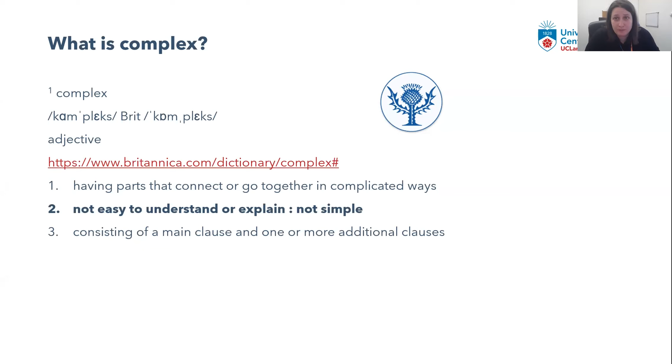As you can see in the title, we have the word 'complex.' I struggled to group together various components that make it difficult to understand or explain some concepts when it comes to buildings. I found that 'complex building' is a suitable term, because according to some dictionaries, one definition of complex is 'not easy to understand or explain, not simple.' So when it comes to buildings, what is complex? Here you see a facade of a building that certainly isn't something you'd call simple. Complexity can come from different components, such as design, height, facade, the use of the building itself, and the use of materials.

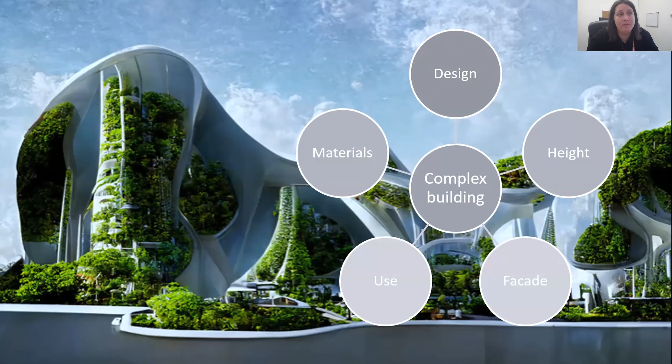Now, why are these types of buildings emerging, and why is this becoming a trend nowadays? You must be aware that there is a green agenda being promoted in most countries, and fire engineers should approach net zero challenges. So one of the issues we should address is actually balancing safety and sustainability.

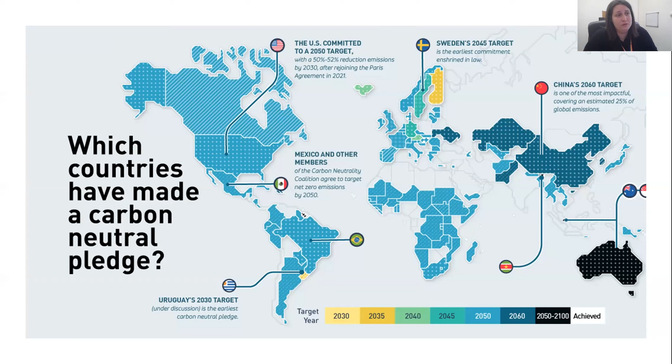This is a very nice graph showing which countries have made the carbon neutral pledge. More than 130 countries have committed to carbon neutrality, and this is a goal. The target year to reach net zero is 2030, 35, 40, 45, 50, and beyond. Only two countries have achieved net zero by now, and most countries around the world are committed to achieving net zero by 2050.

This is also reflected in most regulations in most countries. These are some documents issued by the European Union, the British government, and the Australian government, just as examples. Reduction of energy consumption is a strategic goal for most countries to ensure sustainability and reduce greenhouse emissions. This is the reason regulations are getting stricter and stricter regarding thermal properties and the design of construction and buildings.

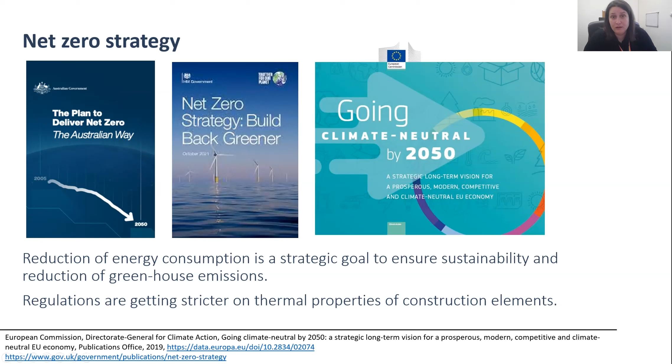This is reflected in how we design our buildings. What is the rationale of the design we use until now? We need to achieve aesthetics because we need to like the buildings we live in, but at the same time, it's now a priority to design energy efficient, sustainable buildings that include innovative components. But let's not forget that one of the main issues is to have safe buildings. Sometimes, though, balancing environmental goals and fire safety can be a rather complex procedure.

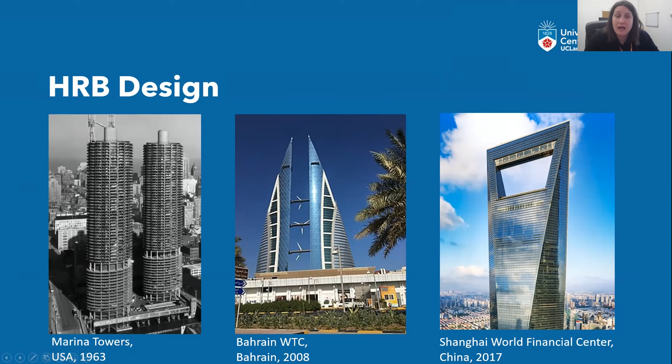But a second category of complex buildings is actually buildings that have curvilinear design. Curvilinearity is a concept that has been widely used for many years by many architects, inspired by some of the most famous ones, such as Gaudi or Zaha Hadid, and the style has been propelled into the forefront of architectural consciousness.

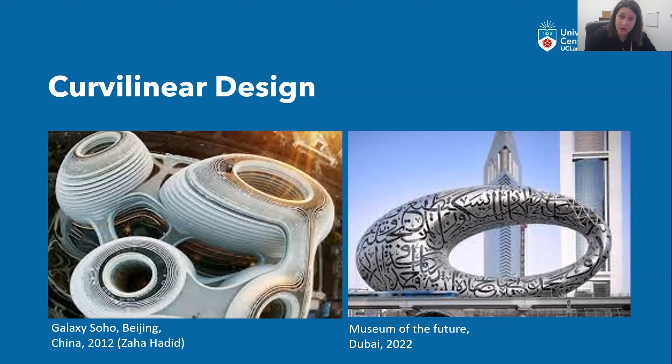On the right-hand side, we see one of the most complex curvilinear buildings, the Museum of the Future, built in Dubai in 2022. This building aims at a platinum LEED rating in terms of green rating, so it's not only a complex and fancy building, but also a green building.

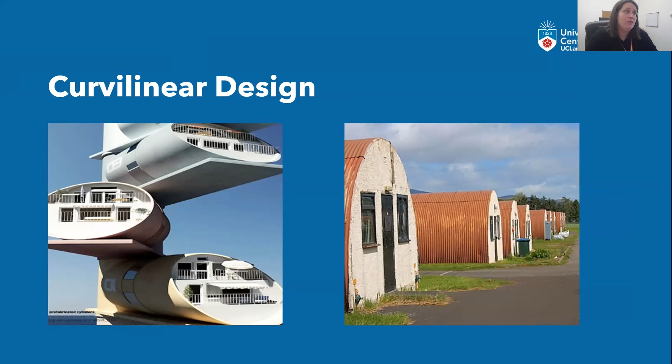Actually, this is the way that we define curvilinearity. So we use normal vectors. A normal is a vector vertical to a surface in order to define the orientation of the surface and what are the geometrical features of it.

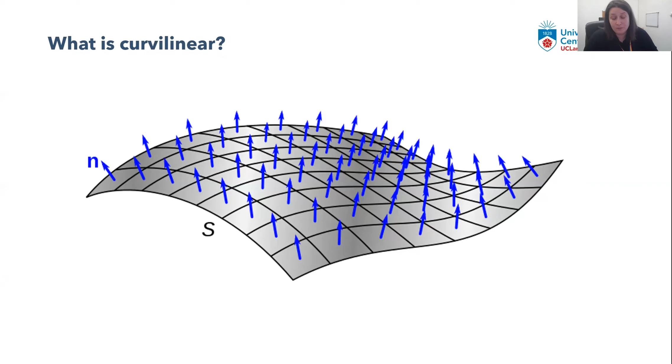But let's start with what is a facade. A facade is actually the skin of the building. It keeps it separated from the external environment.

Now, as we did mention, there is a trend of green building concepts and sustainable construction, so energy efficiency of the facade is one of the major drivers in construction industry. To promote those types of design, we have the development of new energy efficient lightweight materials with good thermal insulation properties, used to reduce heat gain and loss through the facade.

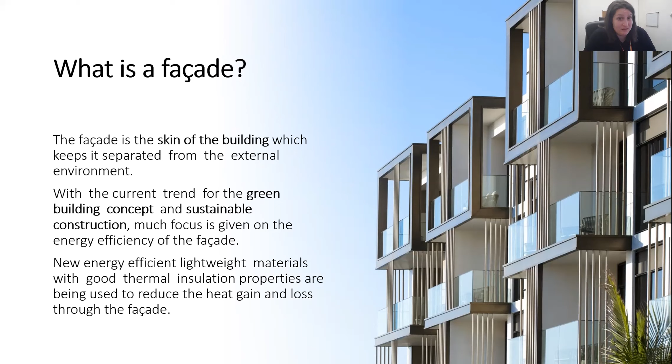Also, as you know very well in Queensland University, other sustainable materials such as wood can be used as part of facades. Now, the problem is that we still have a big number of facade fires happening around the world. So what is the reason?

The reason is that though we have put a lot of attention into building those types of green, efficient, and smart facades, there is less attention to the behavior of such facades in case of a fire. New facade designs have often resulted in significant changes to the behavior and role of facades in the fire spread of buildings.

But we also have new techniques and new materials being developed, and they also contribute, and we still don't have a full understanding of how they contribute to facade flame spread.

Some might argue that non-combustible materials is a guaranteed solution. I would highly disagree on that, because you might still have flame spread and still have problems. So the issue is not to ban specific materials, but rather to learn how each material can contribute to fire and engineer appropriately.

So here, for example, you see some facade fires that happened recently. You should have heard of the Grenfell Tower event, which triggered a lot of debate in this research area and really pushed the direction of research on how we should understand facade fires in high-rise buildings.

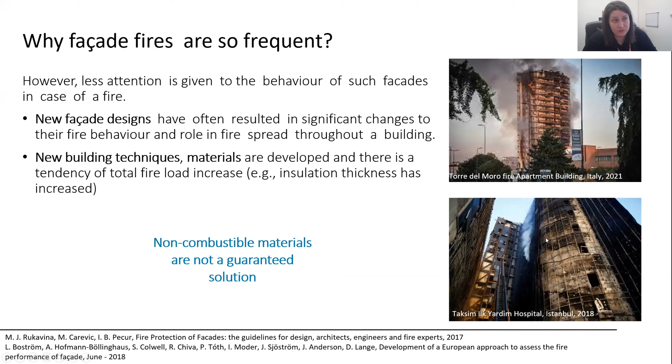So here is the Torre del Moro fire apartment building in Italy, 2021, and Taksim Ilk Yardim Hospital in Istanbul, 2018. I present those because they're not only facade fires, but facade fires in high-rise buildings with curvilinear geometries. So we have established that facade can be a critical element in building fire spread.

And actually, this is not a new field. A lot of work has been done in the past, and it has been acknowledged that flame spread on building elements, especially on walls, is an important application area for basic flame spread theory and material properties obtained from tests. For example, the work of Quintiere, as displayed in many of his works such as Principles of Fire Behavior, is a pioneer in the field.

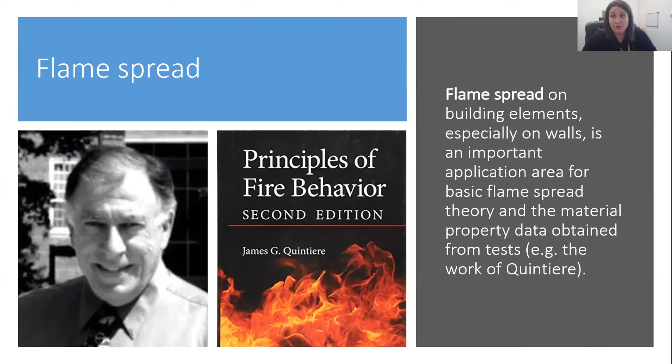And also, there are many different researchers that have focused on those types of fires. Currently, there are some practical approaches and some analytical methods to predict correlations between the theories of ignition, flame spread, combustion, and material properties.

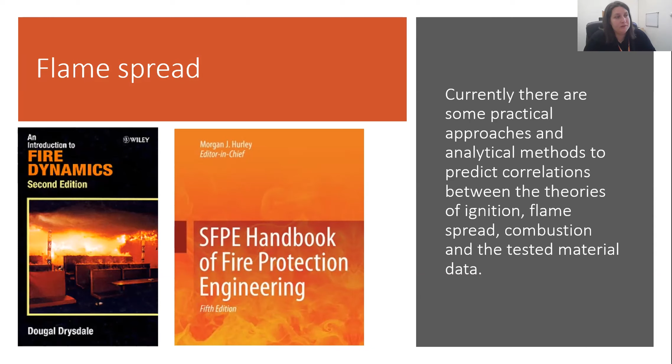But still, we have an occurrence of many incidents around the world. So our student Anoop really tried to record those facade fire incidents. Building on the database that was initially produced by Matthew in Hazelab in Imperial, he extended the data and included recent fires, and he recorded the different types of buildings involved.

So as you can see here, 57% of those buildings are rectilinear buildings, meaning they are orthogonal buildings, but 25% of them are curvilinear and 18% of those are non-orthogonal. This is a registry until 2022, if I'm not wrong, that includes all the information as depicted in media regarding high-rise building fires.

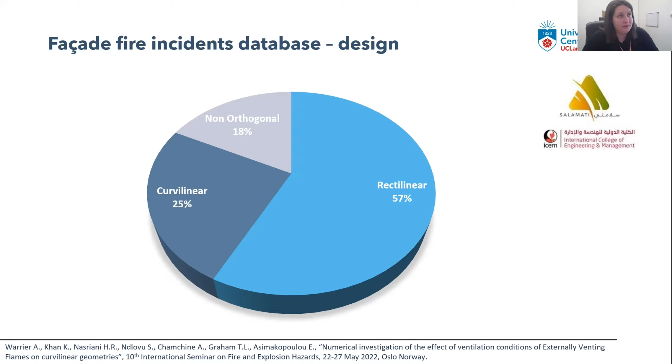So actually, as part of his PhD, we're trying to understand what is the effect of curvilinearity on how facades evolve in curvilinear geometries. And the thing is that this is a study that has started many, many years ago.

One of the first researchers to investigate external venting flames, denoted as EVF throughout this presentation, was Yokoi back in Japan, who investigated the physical characteristics along with Webster and Seigel in the 70s. After that, Margaret Law, in 1978, started investigating the formation and validation of a set of correlations to predict compartment fire dynamics and the effect of facade fires on the heating of external structural elements.

This work was further progressed by Oleszkiewicz, Ohmiya, and Klopovic. Klopovic did the first large-scale test experiments in Canada back in 1999, investigating the full-scale phenomena associated with realistic fire load burning and what would be the effect of ventilation, which is another research area for us.

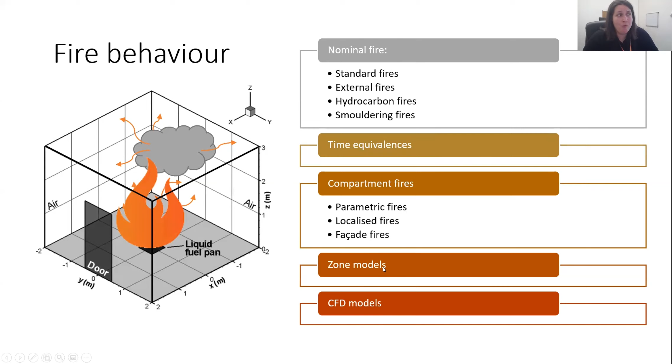Usually, in order to investigate fire behavior, there are plenty of different tools that can be used, such as nominal fires, time equivalence methods, and in compartment fires, specific methodologies for facade fires. On top of that, we can use more advanced models, such as zone or CFD modeling.

In these terms, there are two approaches in the design. Firstly, we have the prescriptive approach, where nominal fires are used to generate thermal loads. This approach indicates a set of rules for the design and verification of structural elements.

One of the main drawbacks and restrictions is that most of the prescriptive approaches currently available can be applied to rectangular geometries with restricted floor areas, no ceiling openings, and no specific thermal properties for multi-layer facades or more complex facade components. An alternative is the performance-based approach, where more advanced models such as CFD or zone modeling can be used. The issue here is that no particular guidance is given, and the identification of the means lies with the engineer. So these are the two different approaches.

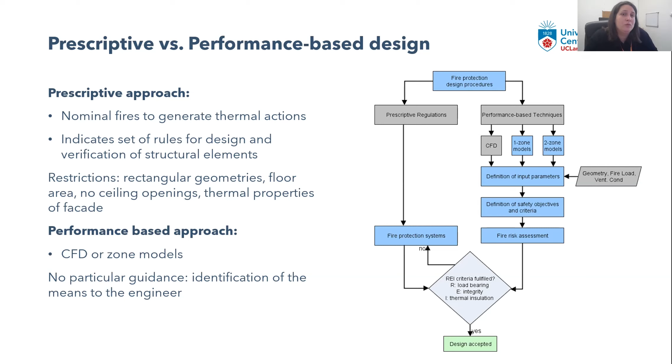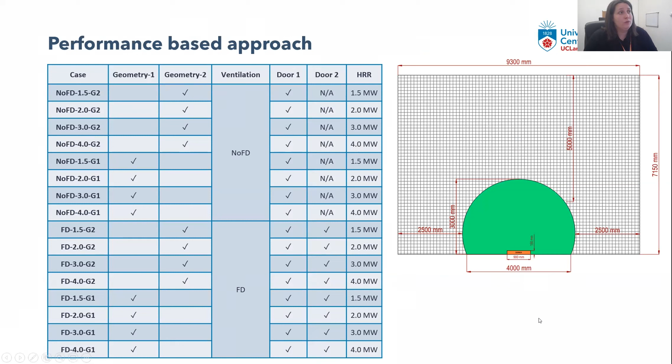So two geometries have been investigated: one with a curvilinear profile, depicted here as geometry 1, and one rectilinear with an equivalent volume. The dimensions as depicted here are the same, so we have the same width and the same length, but each time the height is different in order to make sure we have the same volume in our calculations.

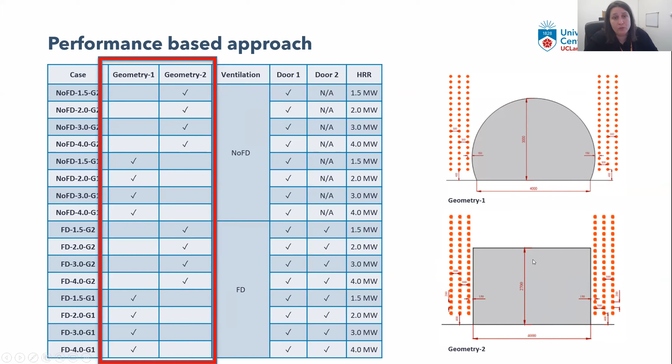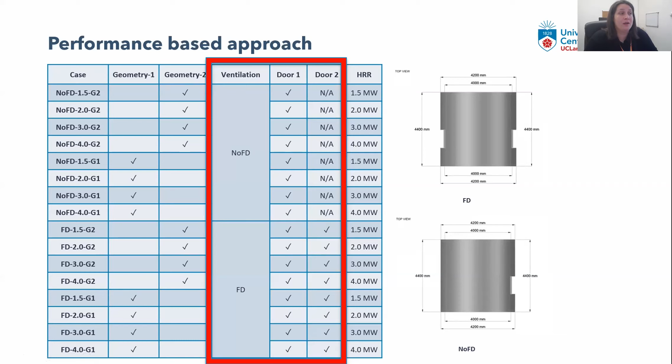Now the second parameter is the effect of ventilation. Two different ventilation conditions have been used: first, the forced draft conditions where two openings exist at the sides of the geometries, and then another ventilation condition where only one opening is located at the fire compartment. The third parameter investigated is the effect of the heat release rate of the fire.

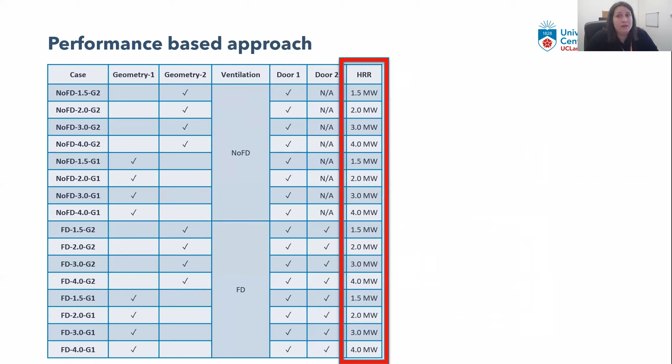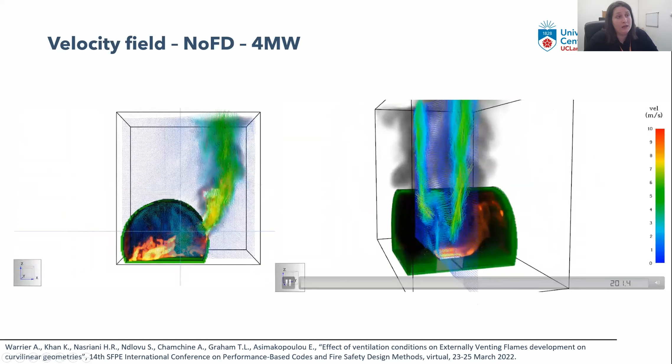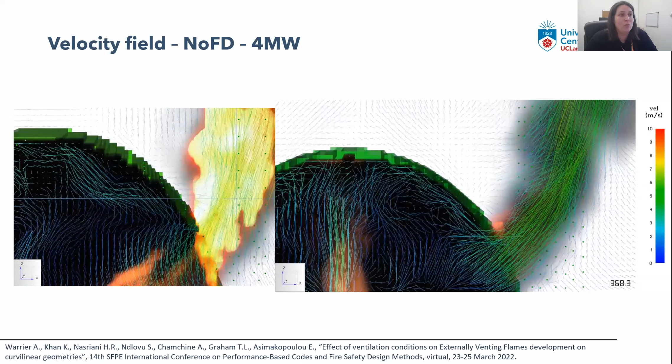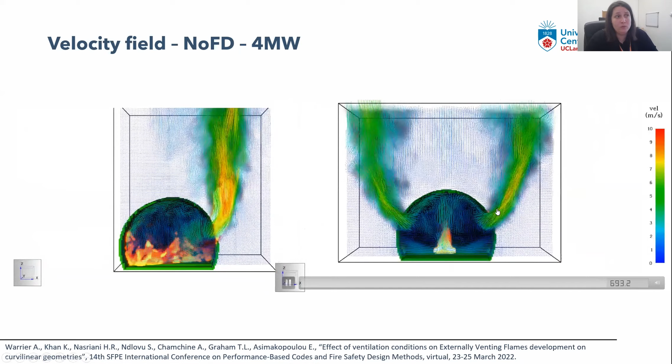We can see that here, zooming in, we see the formation of recirculation zones that are pushing and driving the externally venting flames towards the exterior. We see the recirculation zone formed inside the compartment for the no forced draft condition. But when we have two openings, we get the formation of two recirculation zones at the interior of the fire compartment.

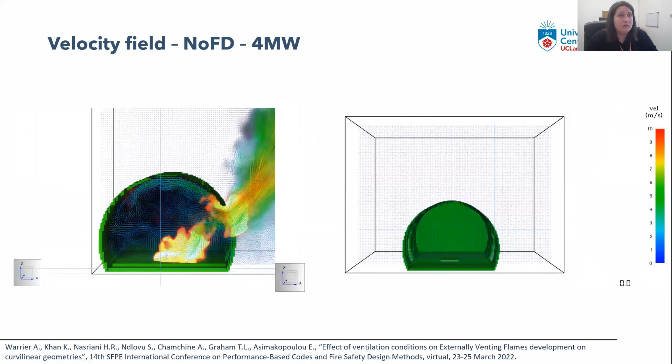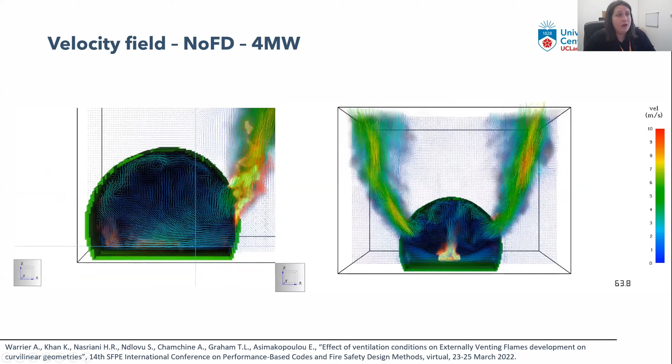The maximum velocity is 9.5 meters per second, and we can observe that the flames are tilting towards the exterior of the building. This is a completely different behavior, and it's also illustrated here.

In compartments with curvilinear geometries, as we can see from the right-hand side images, we have observed a smoke movement that can be a complex fire dynamic process because of the interaction of turbulence, combustion, and radiation with the geometry of the compartment.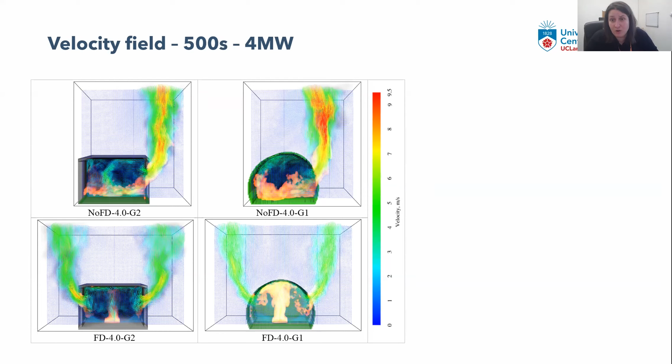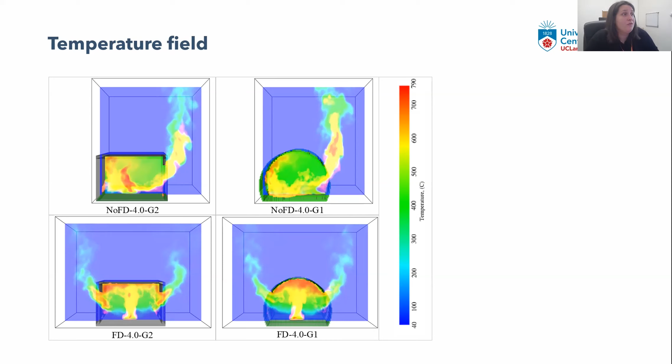Though the shape of the flame usually fluctuates, we can see that the externally vented flame plume sizes are increased in curvilinear geometries for all heat release rates. This is also depicted here.

This is a contour of the intermittency profiles of the flames at the center line of the compartments for both geometries. What we can see here is that the externally venting flame plumes generated under curvilinear fire compartments have higher heights and are more intense.

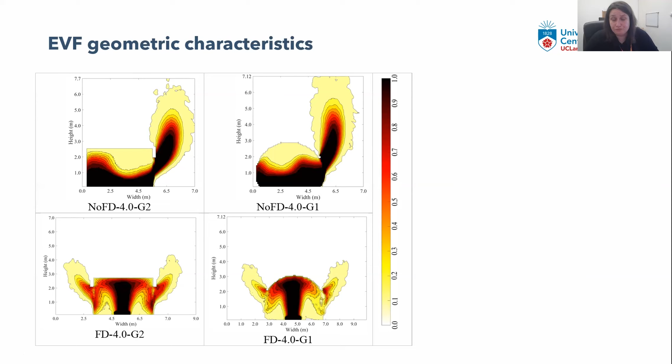Now, the plan is to progress this research and perform fire testing to validate the results and investigate what the effect of scale is.

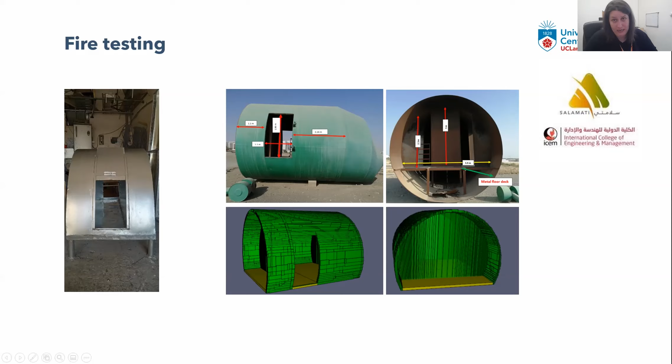This week, Anoop and his team are finalizing fire testing in this curvilinear medium scale structure. Then the plan is to progress testing using this facility that exists at the International College of Engineering and Management in Oman. Preliminary work has been performed to assess how these fires will evolve, but the plan is also to test different ventilation conditions at large scale to investigate the effect of scale.

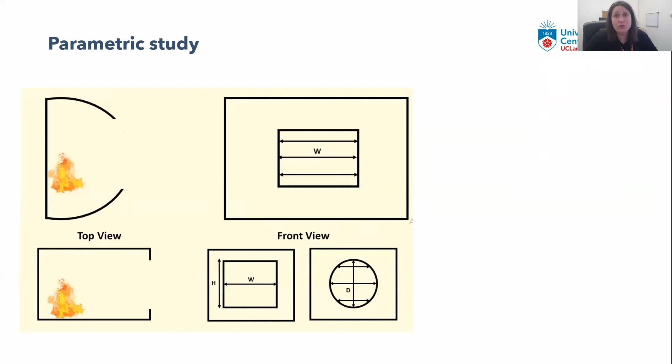Also, the geometry of the opening is of great importance, so different types of openings will be tested to understand the effect of curvilinearity in openings. Now, one of the other crucial parameters in fire development is the interaction of the draft, meaning the ventilation conditions.

As part of the work we have performed with the Technical University of Ostrava, with Jan Smolka and Kamila Kepna, and the International College of Engineering and Management in Oman, and VUBP, we have investigated the effect of no forced draft and forced draft conditions on the development of facade fires.

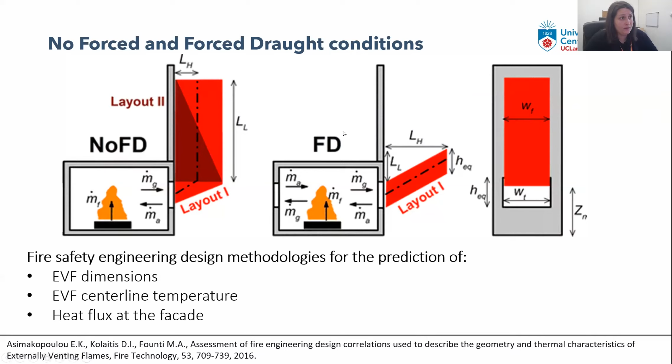There are fire safety engineering design methodologies for predicting the dimensions of facade fires, centerline temperature, heat flux, and generally the impact on the facade. But with the design of this experimental configuration at the University of Ostrava, we tried to investigate the effect of ventilation under forced draft conditions.

To investigate forced conditions, there is a fan placed at the rear side that forces air into this compartment at 2.9 meters per second. In that case, the investigation focused on the effect of the opening dimensions and the wind speed under forced conditions.

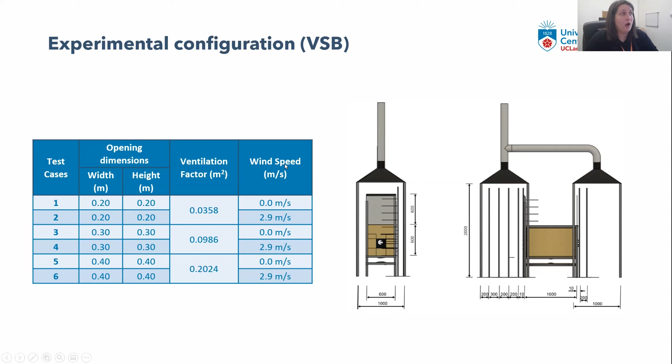On top of that, Anup, as part of his thesis, also numerically investigated the same configuration in order to validate its procedure and to help extend the findings of this research to investigate more and perform parametric analysis.

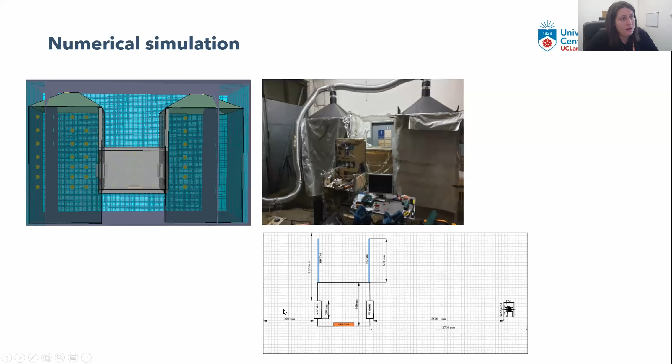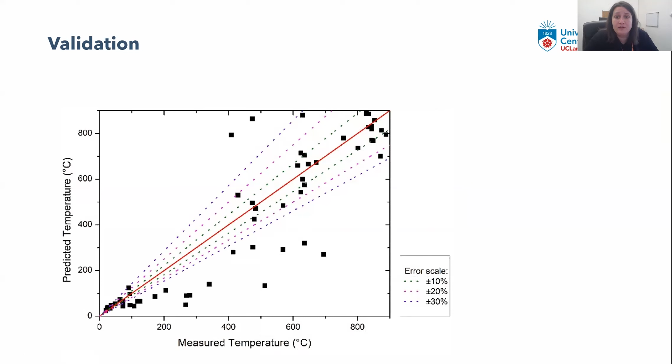As part of the work, a validation process was performed in order to investigate the validity of the predictions. The data plotted, as you can see here, showed that 70% of the predictions fall within the 30% error margin, indicating a good agreement.

Now, when it comes to the investigation of the effect of the ventilation, this is a screenshot 150 seconds after the beginning of the fire, illustrating the flow field developed and the relevant flames when we have a forced draft of 2.9 meters per second.

Here at this image at the top, we have the 20 by 20 centimeter opening, and here at the bottom we see the larger opening. At the left-hand side, we can see the no wind condition, so we have no fan there, and at the right-hand side, the forced conditions.

Now, for all the opening sizes, bidirectional flow was observed as fresh air was entering through the bottom part of the opening, and hot gases exit through the upper part of the opening.

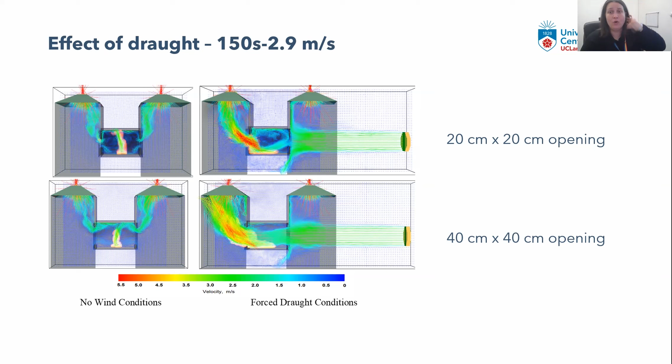Now, the externally venting flame is located closer to the adjacent facade, and under forced draft conditions, we see similar flows: inflow of air from the bottom part of the opening, formulating two recirculation zones. However, once the fan induces the presence of wind, the recirculation zones near the opening are no longer visible, and we have a single recirculation zone at the interior of the fire compartment.

Now, one of the first tasks was to actually validate and compare the temperature profiles. So these are two graphs indicating how experimental results compare with numerical results for the different openings.

With the different colors, black, blue, and green, we see the different opening dimensions, and then with the dotted lines, we see the experimental results, and with non-dotted lines, we have the numerical results.

There is good agreement, especially—and at the left-hand side, we see the no-wind condition, and at the right-hand side, we see the forced draft condition. We can see a very good agreement, but there is a slight disagreement at the larger opening heights.

Now the same results are plotted at the temperature profile at the facade. Here we have still a good agreement, but in case of the greater opening during both forced and no wind conditions, we see a bigger disagreement.

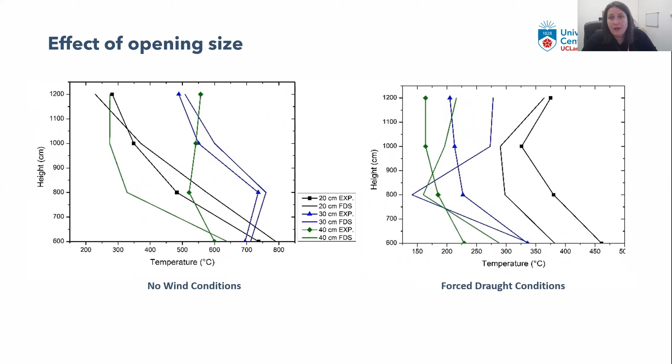Here we can see the developed thermal field in the same circumstances. So under no wind condition, under forced conditions, and here at the higher part is the 20 by 20 centimeter opening and the 40 by 40 centimeter opening.

So you can see how different the stratification of the flow is, how differently the venting flames are ejecting through the opening, and how actually the forced wind conditions can actually influence their shape.

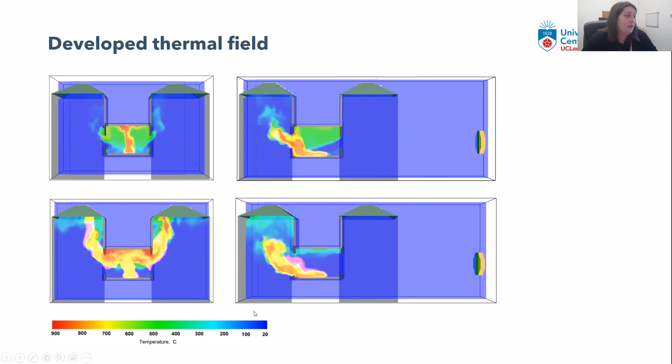Now, when it comes to fire safety challenges of smart cities, as we did already highlight, climate change and the energy source shortages due to fossil fuels drive the use of alternative renewable options in the construction industry.

Now, there are plenty of renewable sources out there, and actually it is a fact that solar is the fastest growing technology worldwide. Along with their exploitation, safety issues and adequate management related to novel technologies are expected.

So there is a rise of awareness of fire risk related to renewable energy technology, with particular emphasis on photovoltaic systems and energy storage systems, because you don't only need photovoltaics to gather energy, but you need to store this energy somewhere. There is relatively low research that has been done until this point.

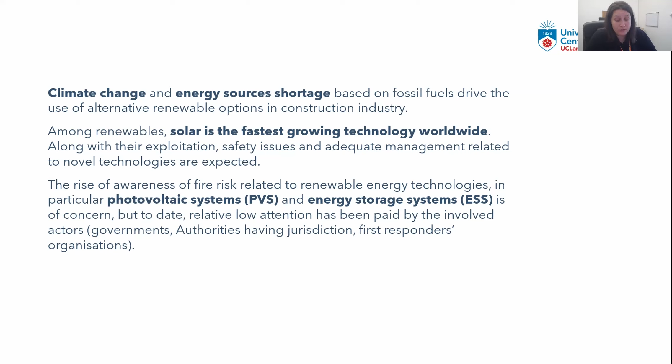The relevant involved actors, such as government authorities having jurisdiction and first responder organizations, should have access to new research data in this area. So we should make sure that actually smart cities are also safer cities.

So we should focus on fire issues in smart cities and what is the impact of the use of renewable technologies on safety, and how photovoltaic and energy storage systems can be protected, and how first responders should be supported. So this is a holistic approach that should be implemented.

One of the most useful and important documents when it comes to the fire safety challenges of green buildings is the Fire Safety Challenges of Green Buildings and Attributes, a report published by NFPA by Brian Meacham and Margaret McNamee back in 2020, illustrating some of the basic concepts that should be followed.

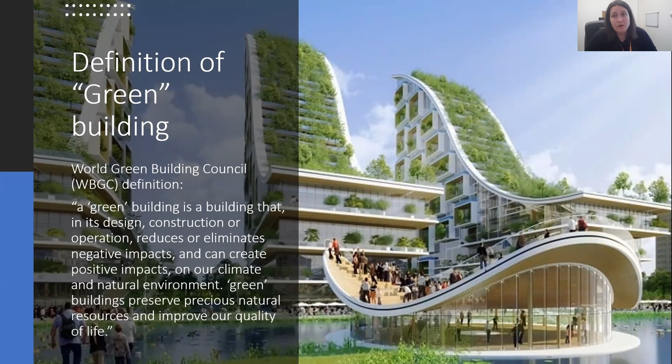Now, if we try to define a green building, according to the World Green Building Council, a green building is a building that in its design, construction, or operation can reduce or eliminate negative impacts and can create positive impacts on our climate and natural environment. Green buildings preserve precious natural resources and improve our quality of life. So in my opinion, these are the buildings that should be designed from now on.

When it comes to resilience, what is resilience? Resilience is the ability to prepare and plan for, absorb, recover, and more successfully adapt to adverse events. Such an adverse event can be fire. So we don't only have to have green buildings, but we have to make sure that we also have resilient buildings. So resilient buildings are those which are designed for long life, and this should be our target.

Resilience can be achieved in many ways, from the use of durable and highly reliable components, to ease of repair and renovation, to high level of resistance to expected hazard impacts. And attributes can include reduced susceptibility to single points of failure, increased robustness, redundancy and reliability of systems and components, and flexibility and adaptability. So actually, the target is to achieve sustainability.

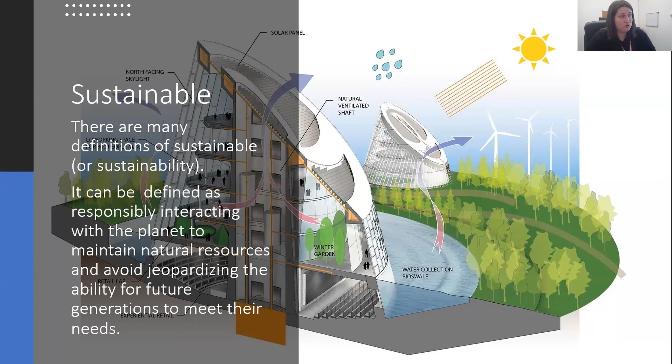There are many definitions of what is sustainable or what is sustainability, but it can be defined as responsibly interacting with the planet to maintain natural resources and avoid jeopardizing the ability for future generations to meet their needs. And a very good technique is to use the risk tetrahedron framework as indicated by Brian Meacham and Margaret McNamee. And this framework is illustrated here.

So we see here the risk framework of unintended fire hazards associated with green attributes, that is surrounded by three main themes: the societal objectives to actually create modern green buildings which do not endanger climate, attributes which express these societal objectives, and control mechanisms that are put in place to ensure that these buildings and communities are fire safe.

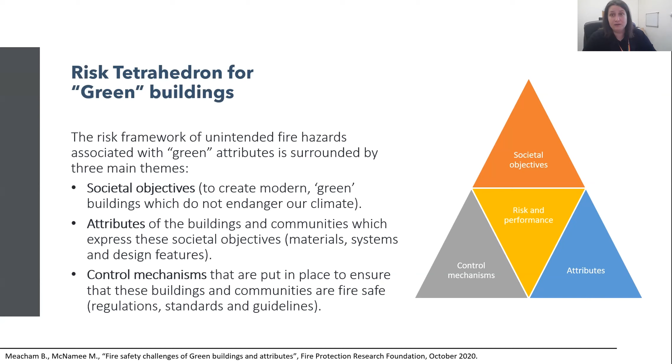Now, when it comes to building integrated photovoltaics, with a specific emphasis on facades, these are also mentioned as BIPVs. BIPVs play a vital role in achieving net zero energy. This refers to photovoltaic modules which can be integrated into the surfaces of the building and can replace conventional building materials. Now, there are many reaction to fire classification tests that can be used for testing those facades, but there is no clear methodology of how those technologies can be treated when they are installed in facades.

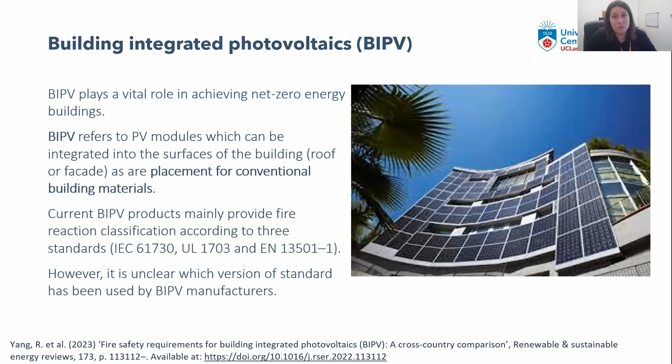One of the preliminary and very vital works that have been performed is the experimental study on flame spread under photovoltaic panels, and also in photovoltaic panels under different orientation, by Kristensen, Fraudzi and Jomaas back in Edinburgh. That was part of Kristensen's PhD. They did investigate how flame spread could evolve under those systems.

And that can actually feed into how traditional firefighting strategies can be upgraded in order to include those circumstances. So there are still many critical issues of fires involving photovoltaics, and they need to be addressed in all the emergency phases. And this is part of the work that we're currently doing at UCLan.

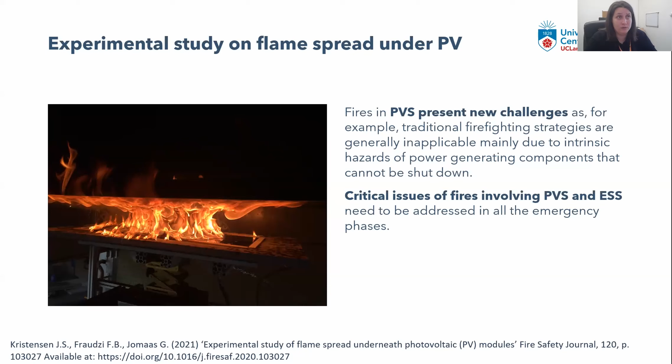When it comes to photovoltaics and energy storage systems, and the methodologies for first responders, there should be identification of the likely fire scenarios and effective fire protection measures, and then characterization of photovoltaics and energy storage systems and fire safety related variables. And then, what is the connection of those systems with the owners and the emergency first responders, and what is the effective training tools for first responders.

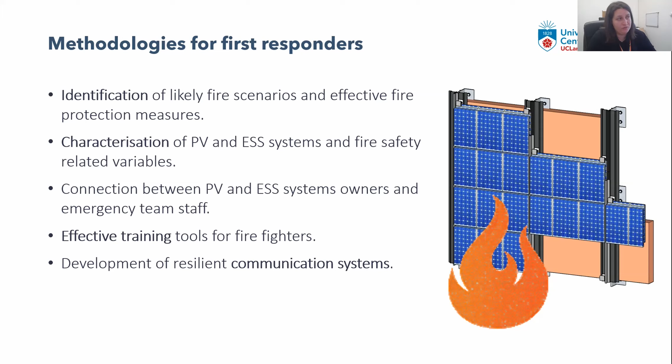Now, this should all feed the resilient communication systems. And what is the purpose of a resilient communication system? To reduce first responders' intervention time, to act towards safer emergency operation, and to prevent fire propagation with mitigation actions.

So, talking about effective fire evacuation, that was one of the main targets of our recent project funded by the Home Office, the SAFE project. In that frame, the strategies aiming at effective fire evacuation in high-rise residential buildings, a project funded by the Home Office in the UK, aims to establish the most effective methods of evacuating high-rise residential buildings.

It focuses on how residents and firefighters, because we shouldn't forget that there is an interaction between them, should interact and make decisions about evacuating in a fire situation.

After the Grenfell Tower fire, there was an inquiry that took place, and it recommended that the government should develop national guidelines to carry out partial or total evacuation of high-rise residential buildings. So back in December 2019, a joint Home Office and Department of Leveling Up Housing and Communities Technical Steering Committee was set up to support the research to support those recommendations. The SAFE project is actually targeting investigating how recommendation 33.22a can be implemented.

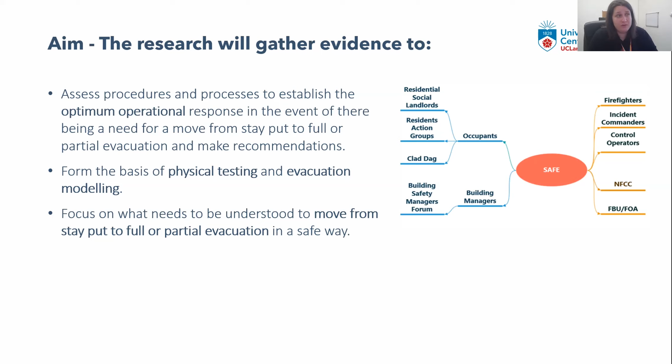There were two phases in this research, and the second phase included both physical testing and evacuation modeling. The purpose is actually to understand how we can move from stay-put to a full or partial evacuation in the safest way possible.

The research questions we tried to answer include the prevalence of evacuation alert systems and their impact on evacuation strategies, the existing strategies for evacuating single, dual, and multi-stair buildings—because this is also a very important factor when we design complex and high-rise buildings, how many staircases are available for evacuation—and what are the most appropriate evacuation strategies when it comes to people with vulnerabilities, and egress considerations for occupants during evacuation.

Back in May 2022, we performed a large-scale experiment along with the National Fire Chiefs Council and the London Fire Brigade, and we are now completing the data collection and analysis of those results.

The first phase of the project focused on operational research to establish the most effective methods, so a series of interviews and questionnaires took place. Today I'm going to present some of the views of the occupants.

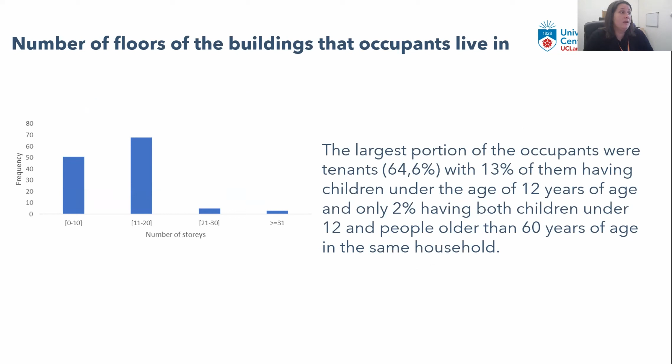From an occupant point of view, the largest portion of occupants were tenants, with 13% of them having small children and 2% having both children under 12 and elderly people in the same household. Most of the buildings had one or two staircases, while only 15% had more than three staircases.

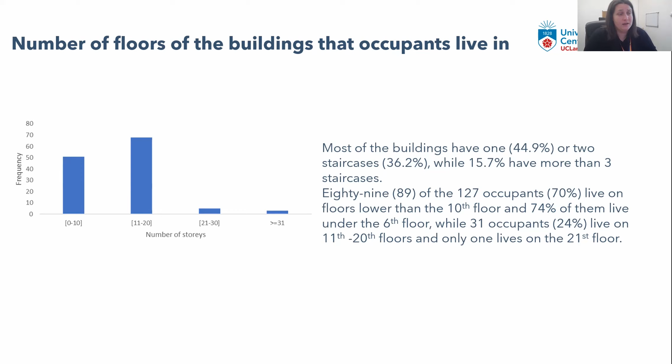70% of the occupants lived on floors lower than the 10th floor, and 74% of them lived under the 6th floor, while 24% of them lived on higher floors.

The prevalence of evacuation alert systems and their impact on strategies was one of the major concerns and research questions addressed. It was evident that only 18% of the occupants were aware of the alert systems in their buildings, and a majority of them considered these inadequate in the building they live in, including text messaging, visual alert systems, and vibrating pagers—only 2% had access to them.

55% of the occupants said they were not aware of any neighbors with vulnerabilities, and some people identified communication among neighbors in high-rise buildings as low. None of those occupants were aware of any help or support their vulnerable neighbors would need in case of a fire. There was also a lot of criticism against the implementation of PEEPs, expressed by 27% of the occupants interviewed.

Almost 80% considered that there was a lack of adequate information and not enough knowledge of the policies that should be followed. When it comes to falling debris, which is a very important issue in high-rise buildings, overall only 36% of the occupants interviewed were aware of the dangers associated with falling debris, and almost two-thirds of the occupants considered that mitigating falling debris risk is an exclusive responsibility of fire rescue service personnel, because most occupants are willing to evacuate without considering this.

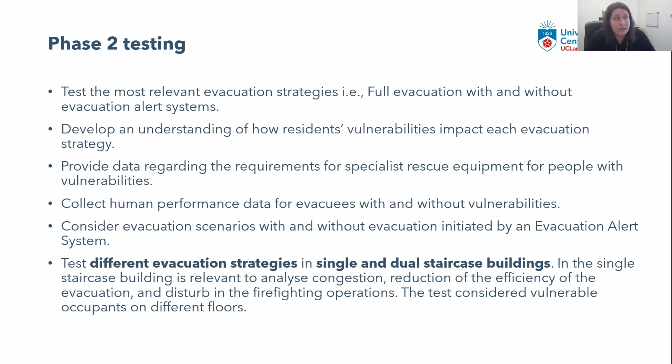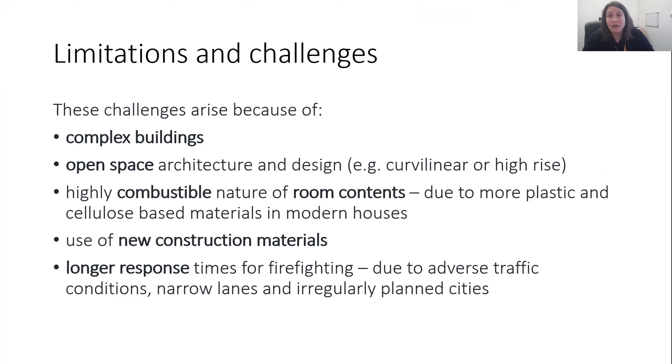Now, what are the limitations and challenges? There are many limitations and challenges arising from complex buildings and open space architecture, especially now that we use highly combustible room contents and new construction materials. Also, when it comes to firefighting, we have longer response times.

In cases of active fire protection, we have prescriptive codes with limited guidelines on providing acceptable limits for functional and performance reliability of new and existing fire protection systems. There is also a lack of rational provisions to standardize the qualitative and quantitative requirements of fire protection systems, such as sprinklers, smoke detectors, fire extinguishers, etc.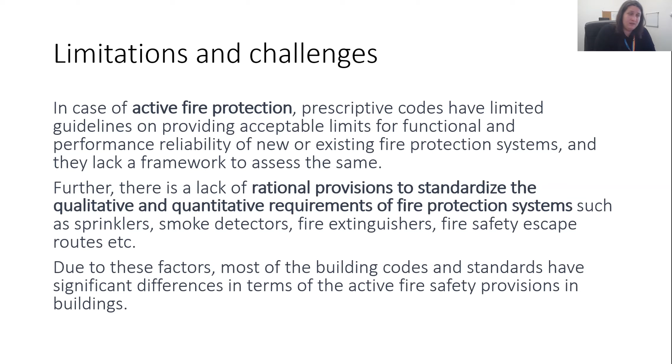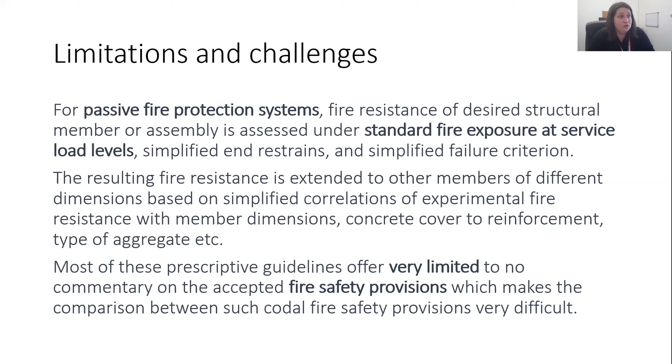Due to those factors, most building codes and standards have significant differences in terms of active fire safety provisions in buildings. When it comes to passive fire protection systems, fire resistance is assessed under standard fire exposure at service load level, which is a simplified approach with restraints and simplified failure criteria. So it's important to upgrade those as well.

Now, what is the solution? In my mind, the solution is to implement an integrated framework of strategies for improving fire safety in buildings, and that would require four different approaches for the fire protection features, and how regulations and enforcement should be informed.

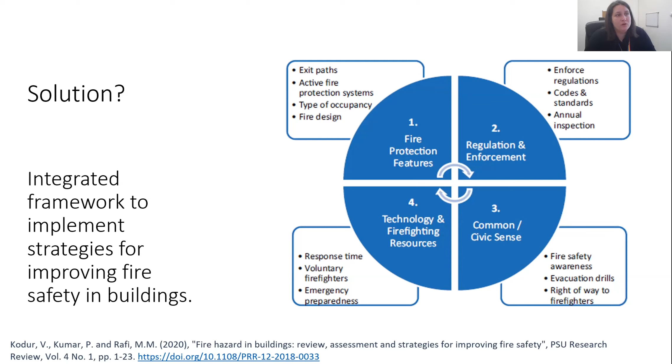How we can provide awareness, and how we can cultivate common and civic sense, and then as a fourth component, how we can improve technology and firefighting resources.

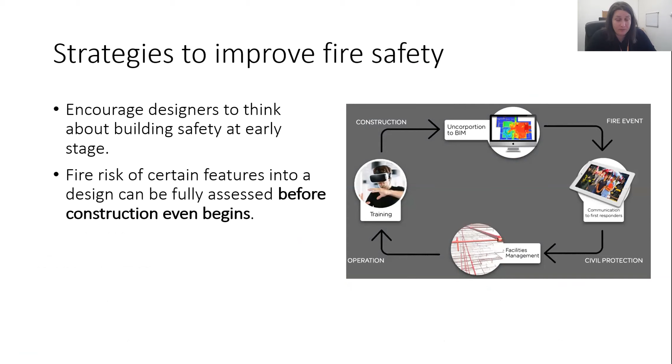The aim would be to implement those strategies as early as possible into the design of buildings. The fire risk of certain features can be fully assessed even before construction begins, using BIM, for example. And of course, all of this should be integrated into our education.

So this is some work we've performed through this project, Skilled to be a Fire Expert, which provided an online learning platform for fire experts on various components.

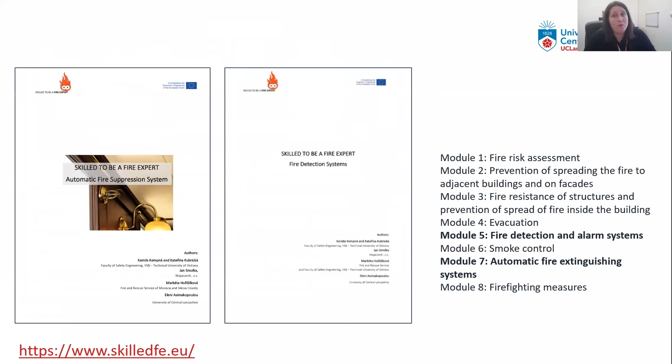Now, what are the conclusions? I very much agree with what NFPA illustrates, and according to that, fire safety is actually a sustainable practice, one that should be taken into account before, during, and after a fire event. If we reduce the amount and severity of fires, we can reduce wasted materials, pollution, and save money through the life cycle of the buildings.

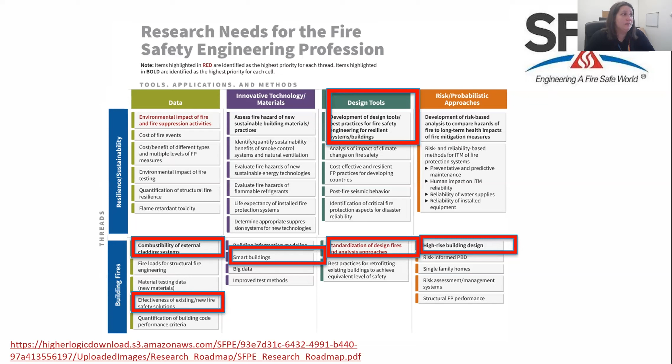This is also highlighted in the roadmap for research demonstrated by SFPE. So here is an example of how we can adapt our data, innovative technologies, design methods, and approaches in order to tackle building fires and improve resilience and sustainability.

When it comes to safety, new materials and smart, complex buildings challenge how we approach safety, and more research should be fed into the interaction of fire and structure when it comes to modeling. More round-robin studies should be performed to have access to experimental data to validate our software and our codes.

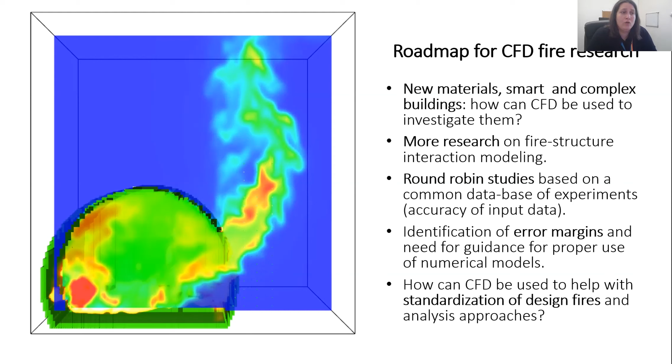We should pay more attention to identifying error margins and the need for guidance for proper use of numerical models, and all of that should feed into the standardization of design fires and the relevant analysis approaches.